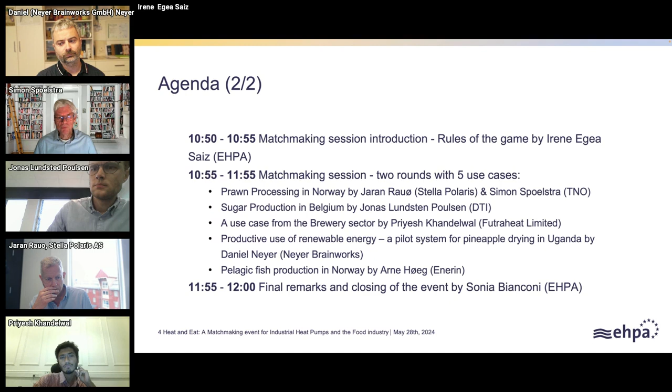So if we go to the next slide, I can introduce a bit the Remo platform interactions. In the first session, as you can see, you can only send reactions and type messages. There will be no Q&A for the presenters, so you will not be able to ask questions to our experts. Please save all your questions for the second session, where you will be able to switch on your camera and mic, send reactions, type messages in the chat, and questions are very warmly encouraged.

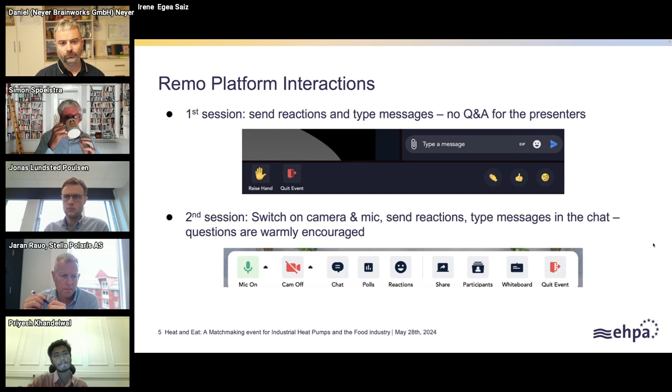And before leaving the floor to our speakers, I would like to give you a short intro of the 3 projects that we have here today. This event is being organized in the framework of these 3 projects. They are research projects funded under the Horizon Europe program, and they all aim at fostering the uptake of high temperature heat pumps for industrial application.

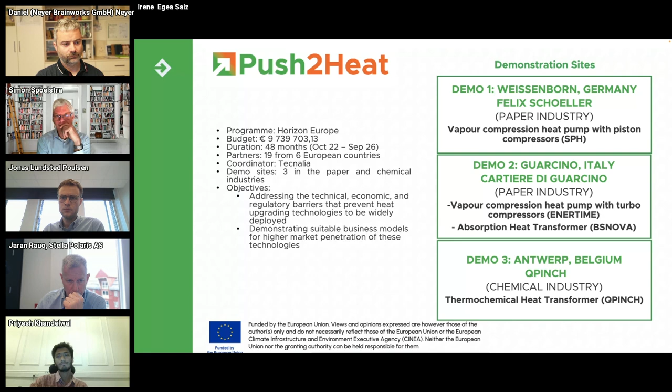So we have Push2Heat, whose demonstration sites are located in the paper industries and in the chemical industries. Then we have SPIRIT, whose demonstration sites are located in a sugar factory and a prawn processing plant in Norway. About these two demo sites, you will already be able to hear in the matchmaking part. Also a paper plant in Czechia is one of the other demo sites.

And then we have SusHeat, that aims to develop a new generation of highly efficient AI-assisted heat upgrade systems to harvest and store renewable energy for intensive factory processing needs. A case study about this will also be presented in the second part of this event.

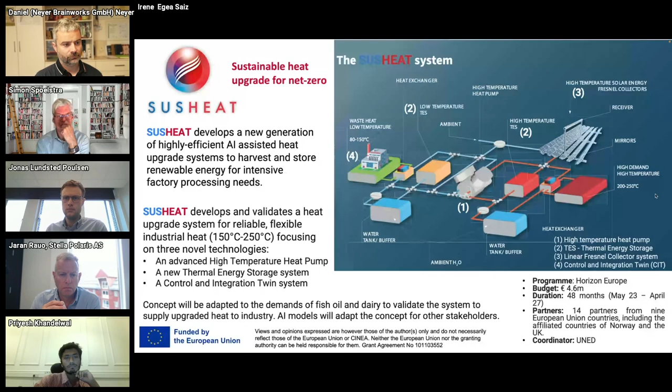And without further ado, I think we can stop sharing the slides and allow our first speaker to start presenting, Eric Lecomte. While Eric shares his presentation, I will say a little bit about him. Eric Lecomte is Policy Officer at the European Commission, DG Energy, since 2015. As Policy Officer at DG Energy, Eric is in charge of energy efficiency and transition to carbon neutrality in industry, but also heat pumps for industrial, commercial and residential applications and direct current technologies.

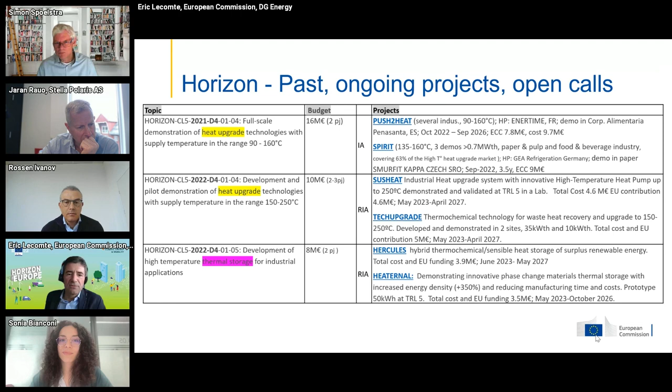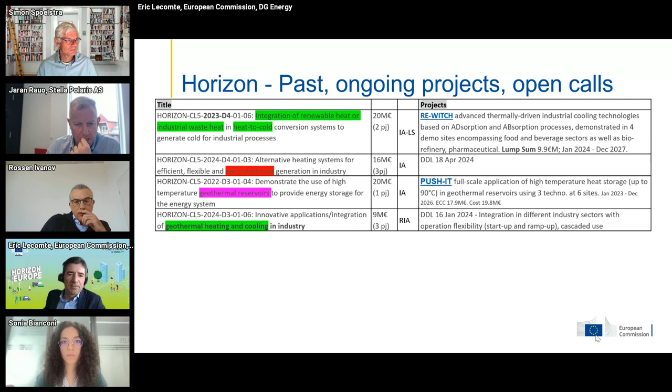And then also about storage in geothermal reservoirs, there is the project PUSH-IT. And finally, geothermal heating and cooling - not about heat pumps maybe, but also relevant for your sector.

Now looking more into the future, in the work program 2025 in the Horizon Europe Cluster 5, the one I'm in charge of, there will be one topic, but the bulk of the topics will be in Cluster 4. Obviously, in the Processes4Planet partnership, so this is only a draft that can still change.

So it's about really phasing out fossil fuel in energy-intensive industries through the integration of renewable energy sources - in plants where there is a significant heat or cool demand, with local integration of a combination of renewable energy sources, storage, process flexibility, heat upgrade by means of industrial heat pumps, and even combined heat and power from renewable biomass. A lot of freedom given to those projects to ultimately reach complete phase-out of fossil fuels.

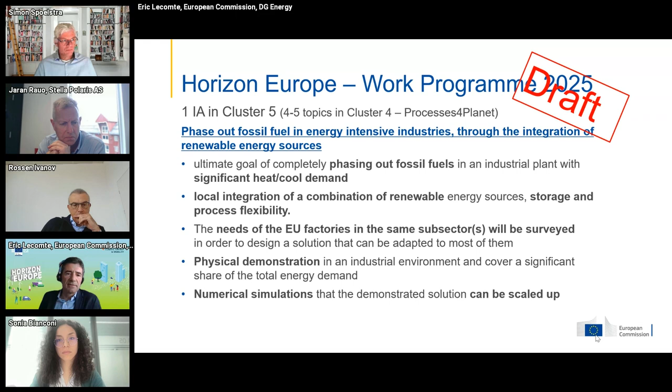Interestingly, the needs of all EU factories in the same subsector will be surveyed - not only one factory, but the whole sector, to design a solution adaptable to most plants in the EU. There will be physical demonstration of a significant share of total energy demand met by renewable sources, but also numerical simulations to demonstrate this physical solution can be scaled up to produce nearly all the energy needed in the plant.

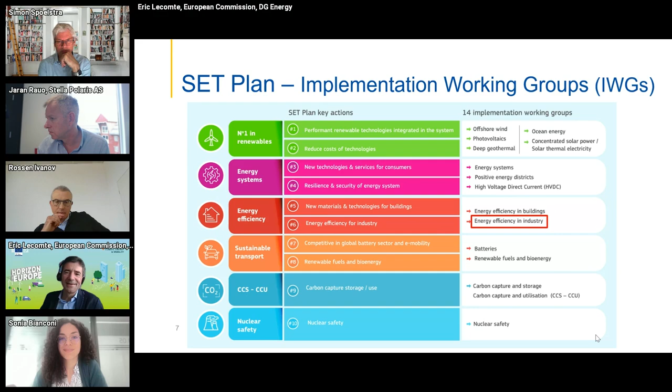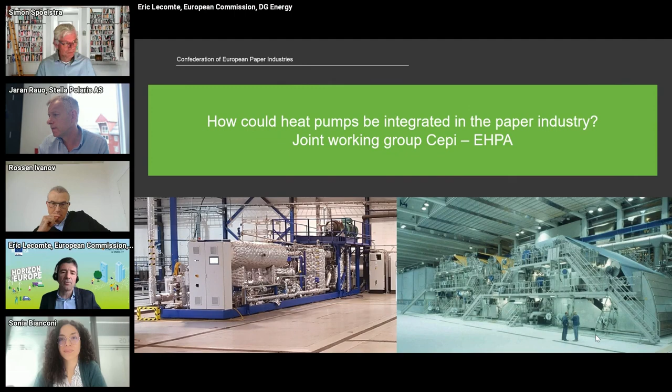And now I will continue with some slides borrowed from CEPI to explain a bit how they had this joint working group between the paper industry, CEPI, and the Heat Pump Association, EHPA. This is something we would like to replicate, for instance, in the food sector, hence very relevant for today in this workshop. So several steps that they have taken, 5 steps, which I will now describe in more detail.

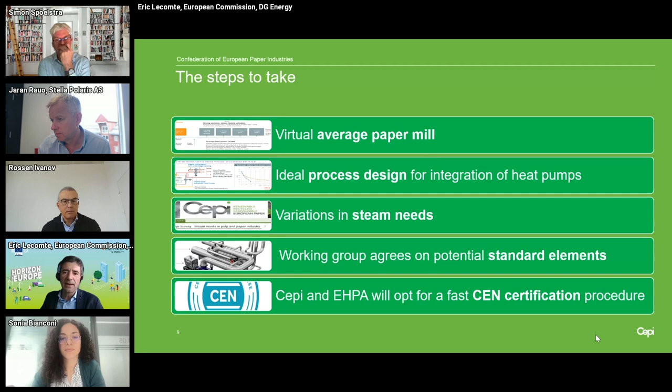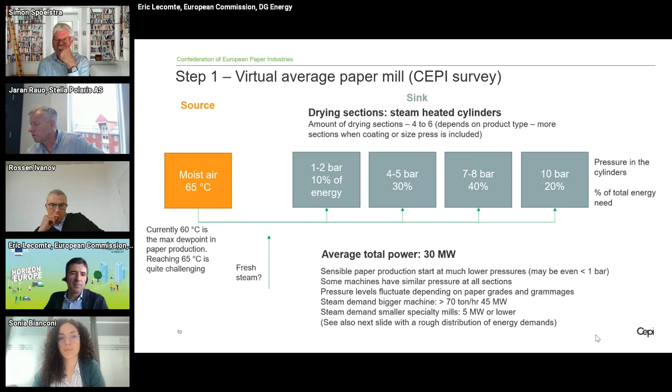So the first step is to make a survey of all the industrial plants, in this case paper, to define what is the virtual average paper mill. You see in gray all the heat needs, the 4 gray boxes, and on the left in orange, the source of heat, of waste heat at the exhaust of the process. So describing the average paper mill based on the survey, that is the first step.

The second step is to discuss with the Heat Pump Association to design a common heat integration design using heat pumps. You see the heat pump on the left that is using the exhaust air to produce steam, distribute the steam in the process, and then at the bottom, 3 consecutive recompression stages to raise, to upgrade the steam pressure and temperature to really meet all the needs in the paper mill. So that is the schematic of the solution.

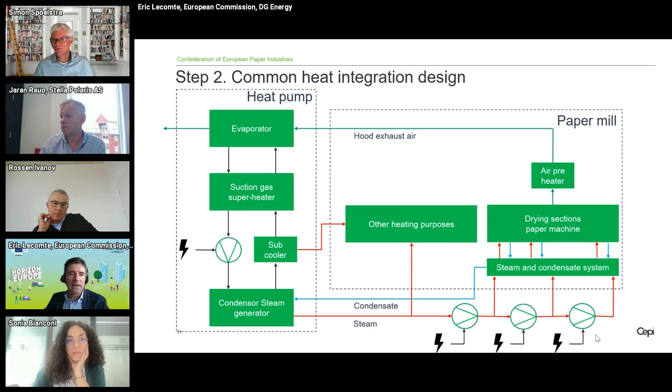But then there was a discussion because actually the needs expressed by the paper industry were a bit difficult to achieve efficiently by heat pumps. So they discussed what is the real pressure need, temperature need, and then they realized that actually they didn't need such high temperature or pressure, and so they reassessed the needs to optimize the heat pump solution.

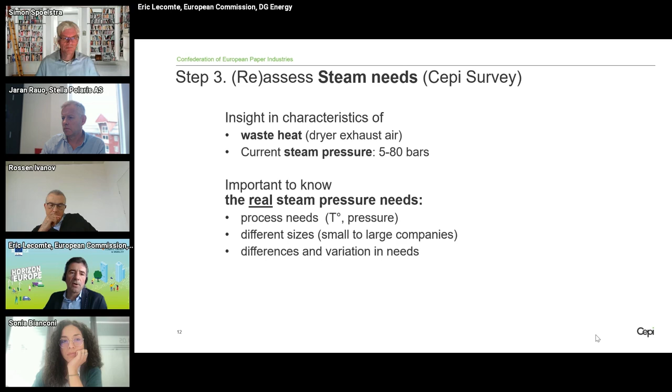But still then keeping flexibility inside each paper mill to arrange those common elements in the way they want in each individual paper plant.

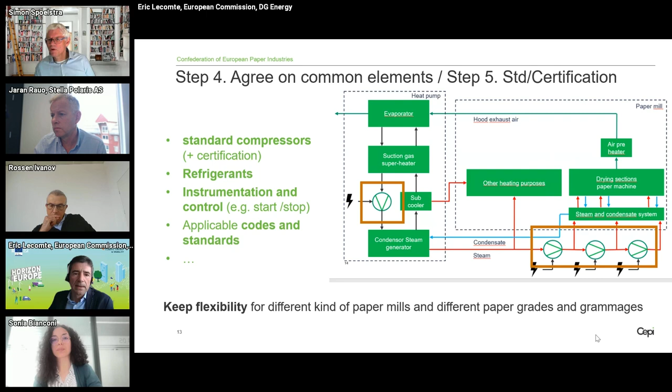So the benefits are indeed to have a common design, a standardized compressor, with much lower cost. Of course, better knowledge of each other - paper industry knowing heat pumps, heat pumps knowing the paper sector, understanding each other - and definitely lowering the risk for individual paper plants to go into the deployment of industrial heat pumps. And with lower risk and lower cost, of course, the business case is easier to build and easier to convince banks to go into the adventure.

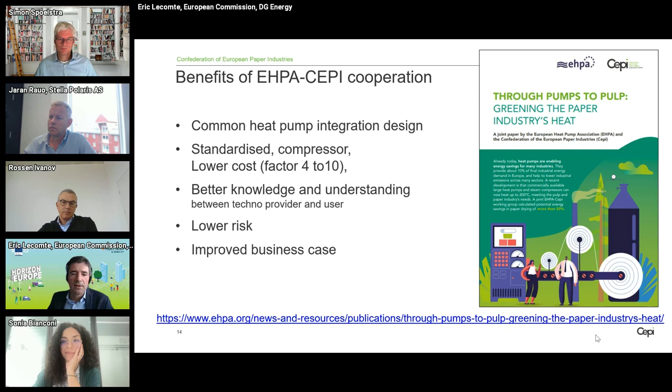So you have the link to the paper that describes this. And that's it from my side.

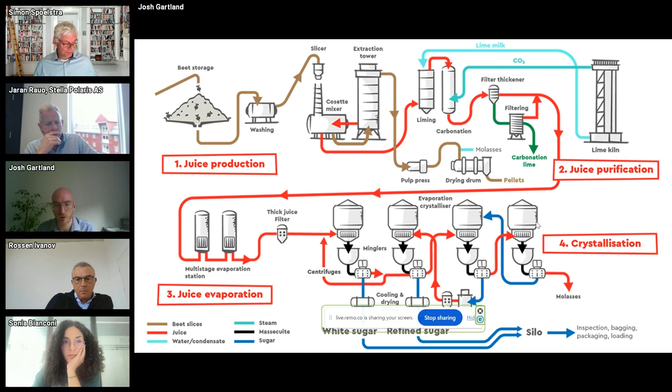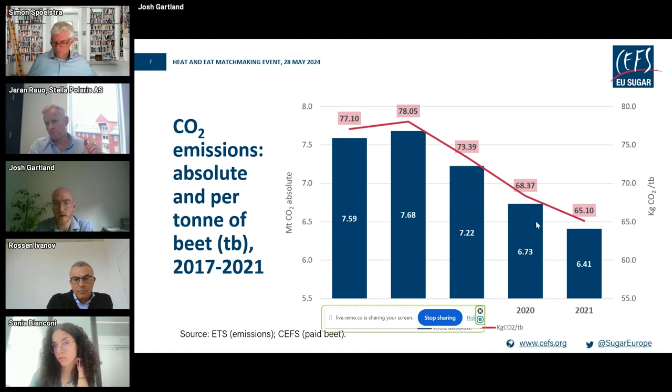So we have made progress in reducing our CO2 emissions. You can see since 2017, there's been quite a good reduction, both in absolute terms and in terms of kilograms of CO2 per ton of beet processed. So we do produce less sugar than in 2017 due to various reasons, but emissions are down not just because of that, and they're also down for every ton of beet we process.

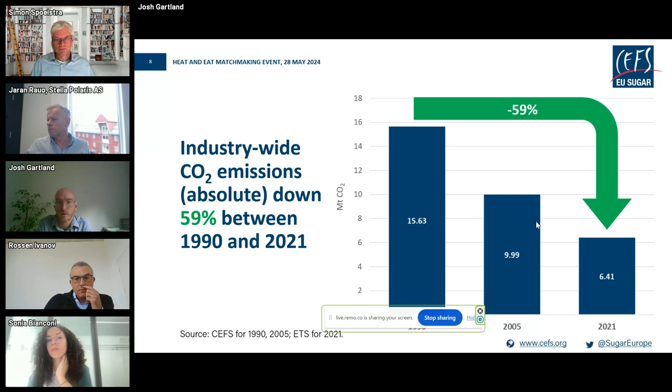And if we take a longer term view, we can see that emissions are down 59% between 1990 and 2021. So we've already reached the Fit for 55 target. We think that we'll deliver another 30% reduction by 2030. And we're aiming for climate neutrality by 2050 in line with the EU. So this is a possible trajectory of emissions in the sector.

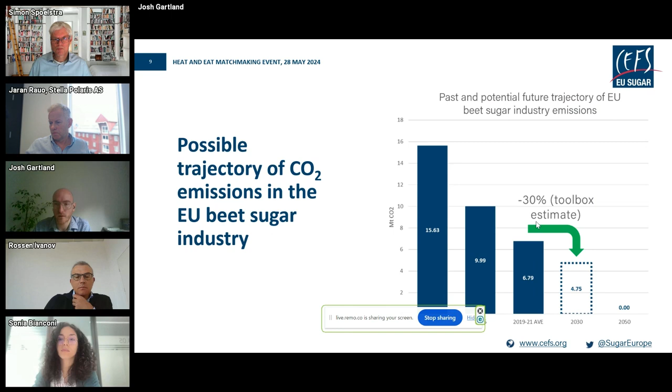And of course, there's an economic imperative to decarbonize. We're a carbon leakage sector again, and therefore we will see a reduction in free allowances at a higher rate than previously, and also emissions allowance prices will increase.

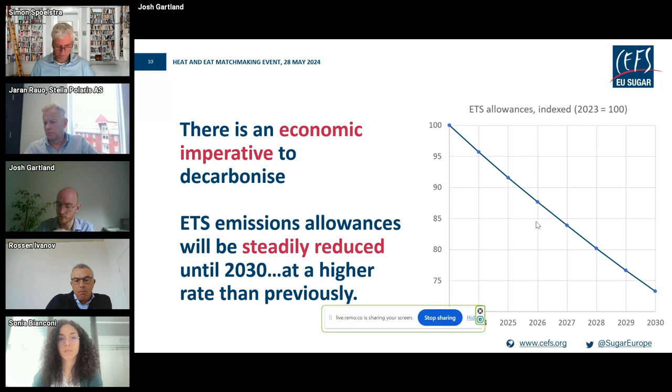In terms of the emissions hotspots, I think the biggest one is the production of heat and electricity. Our factories, because they're located in rural areas, they generally produce heat and electricity on site. I mean, all of them actually produce heat and electricity on site. And that can be over 50% of energy usage, generally more, and over 60% of emissions.

Where the beet pulp, which is the fibrous non-sugar residue, is dried to produce animal feed, that can use up to 50% of the energy generated, and it can contribute up to 30% of emissions. And then we have the lime kiln, which can be 5% of energy and up to 10% of emissions. It's more emissions intensive because we generally use coke as the fuel in the lime kilns.

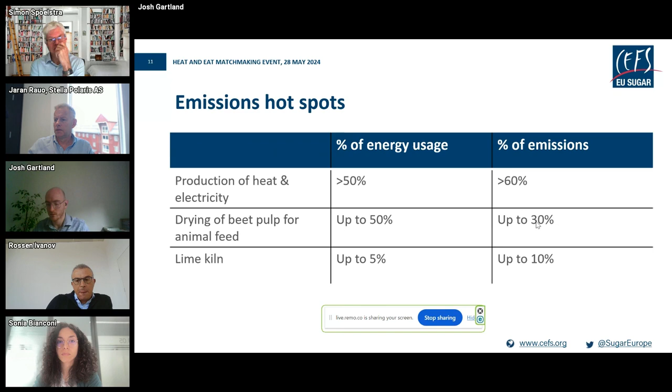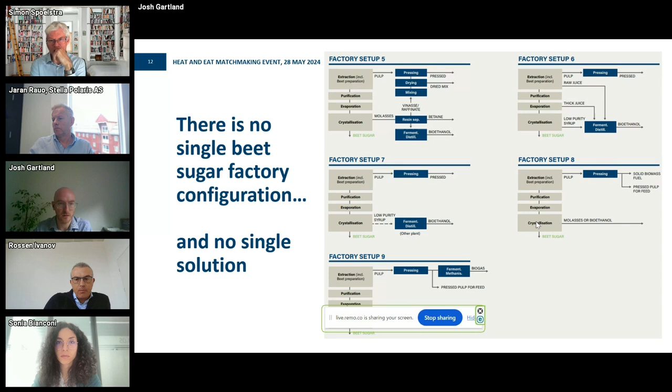We identified a number of tools. We split them into two baskets. So the first one was renewable energy, which can be own biomass residues. It can be external biomass and biomethane, and it can be on-site renewables.

And then we identified other tools such as low temperature drying of beet pulp, for example, where you reuse the waste heat from the sugar production process to dry the beet pulp. Heat recovery, such as additional evaporation effects, where you reuse waste steam in order to increase the efficiency of the evaporation stage. Heat pumps, which could be industrial heat pumps, but could also be mechanical vapor recompression, which we already use in the industry.

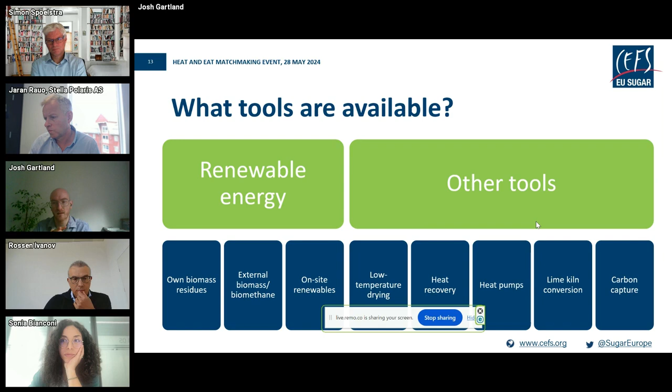Lime kiln conversion, which is where we would switch from coke to a less emitting fuel, or potentially even purchase the limestone that we use externally. And then another tool which is not used as yet in the sector, which is carbon capture.

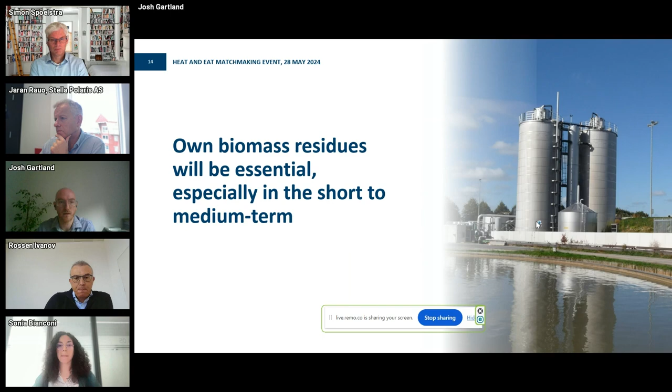Own biomass residues will be essential, especially in the short to medium term. So that's mainly the beet pulp. We think that could generate sufficient energy to power the factory, especially if it's a very energy efficient factory.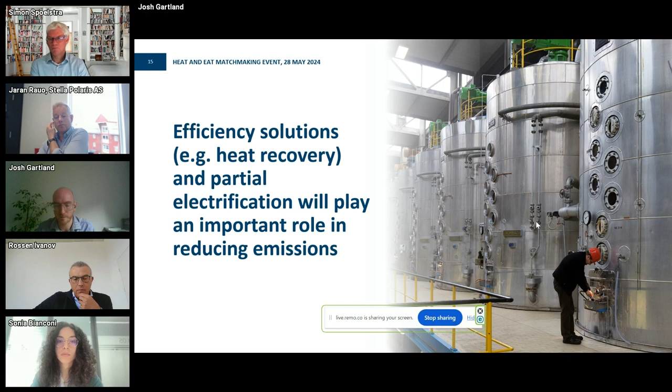That being said, in many cases, efficiency improvements are reaching their limit. For example, here you can see Germany. The energy use in the sugar industry has plateaued since 2000. So perhaps we need to look into other solutions.

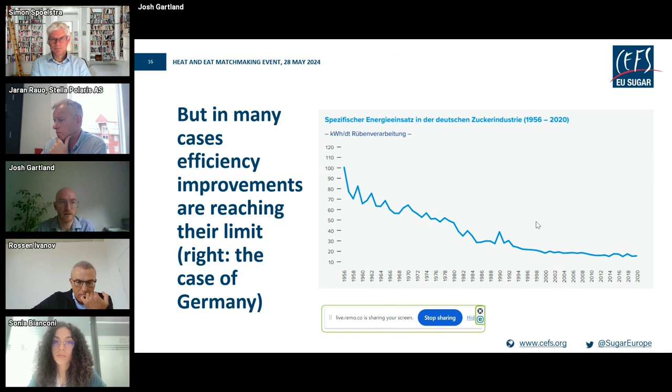One of these solutions is high temperature heat pumps, but these are still in testing phase, and the consensus among our members is that electricity prices need to be brought down in order for these to be viable.

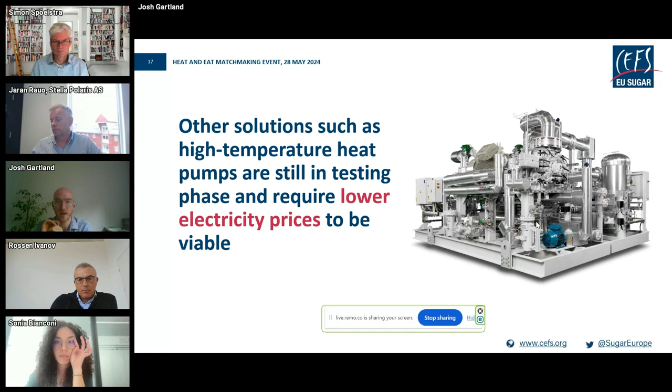If the coefficient of performance of your heat pump is 4, for example, but electricity prices are over 4 times as high as your natural gas prices or your cost of production of biomethane, then the industrial heat pump is not going to be viable. So lower electricity prices are really essential to make this solution work.

There's another type of heat pump I mentioned, called mechanical vapor recompression. You're basically recompressing the steam mechanically to increase the temperature. But that's generally compared with another solution, thermal vapor recompression, which is generally preferred just because it has lower capital expenditure and requires, again, lower electricity prices to be viable.

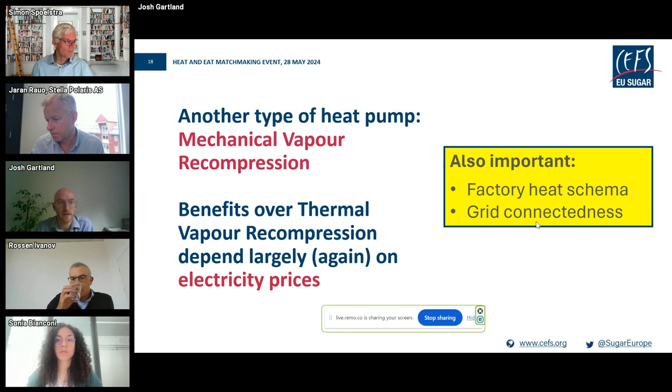Other important things for installing mechanical vapor recompression are the heat schema in the factory and the level of grid connectedness. Again, a general issue for us is that our factories are located in rural areas and don't always have good connections to electricity grids.

So the consensus is that full electrification is not for tomorrow, and something we hear far too much about is renewable low carbon hydrogen. I think it's going to be very expensive and scarce, and is not an appropriate solution for the sugar industry.

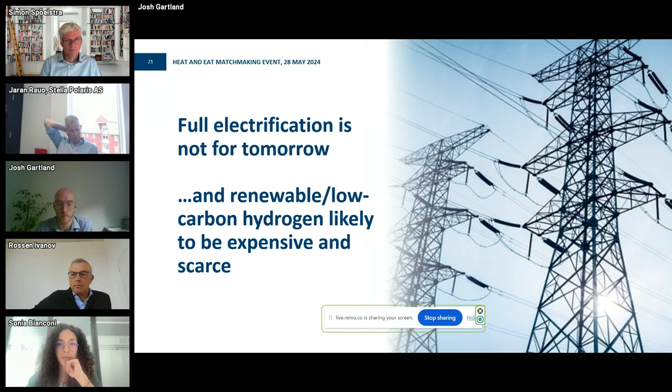In terms of the policy framework, we were asking for a pragmatic implementation of the Renewable Energy Directive to allow us to use biomass residues. On the Energy Taxation Directive, if that ever comes to light, we would want that to exempt the energetic self-use of residues. In general, electricity prices should be brought down. If the EU wants us to electrify, make it cost effective to do so. And the final request is we need direct financial support, grants, loans, carbon contracts for difference, so support that targets both the CapEx and the OpEx sides.

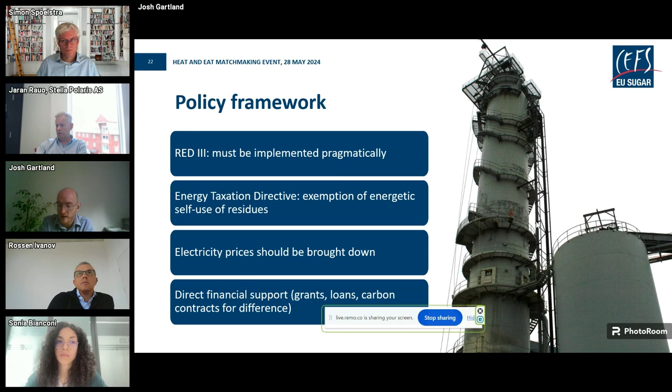That concludes my presentation. Thanks a lot for your attention and for the invitation.

Thanks a lot, Josh. Thank you for telling us more about the EU sugar processes, and of course the specificities of this industry need to be taken into account in order to integrate CO2 reduction technologies such as heat pumps, for example. I was actually very impressed with the numbers you showed in terms of emissions reductions that you've achieved so far. So great job, I would say.

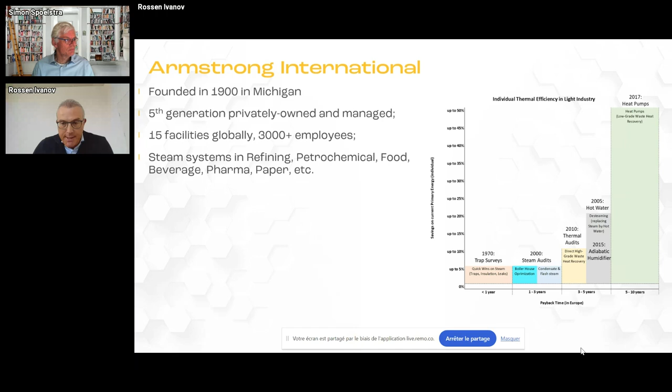And then we crossed the mirror. We went on the other side of the process and found waste heat recovery as a potential for further energy efficiency. First, direct heat recovery using high-grade heat, and then lately low-grade heat recovery using heat pumps. The reason is decarbonization. That's the paradigm shift for all of us, end users asking for ways to completely decarbonize their plants. We reached the conclusion that the only way to decarbonize heat without significantly increasing the energy cost is to leverage the significant amount of free decarbonized local waste heat available at the plants. So we put together a design methodology called circular thermal, where we are bundling pinch methodology, direct heat recovery, and low-grade heat recovery, using also de-steaming as a way to facilitate the implementation.

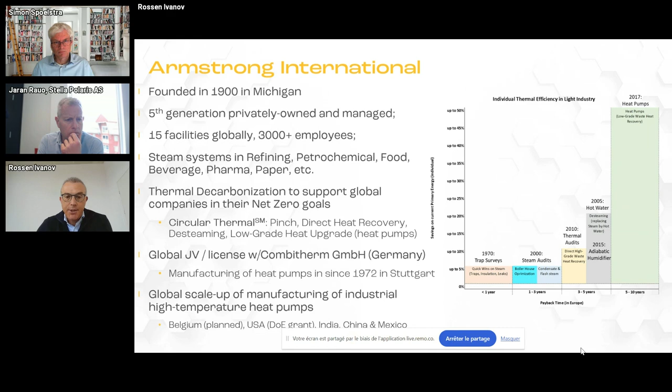As we did not have the technology in-house, we partnered with a German company called Combitherm, which has been manufacturing heat pumps for 50 years in Stuttgart, including above 80 degrees for the last 20 years. We are currently scaling up manufacturing of this technology across the globe: US, Belgium, India, China, and Mexico.

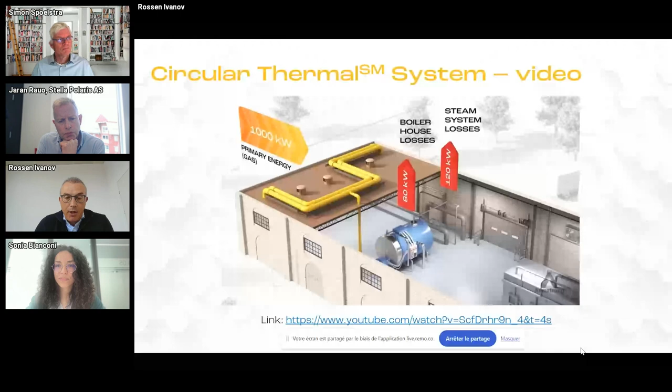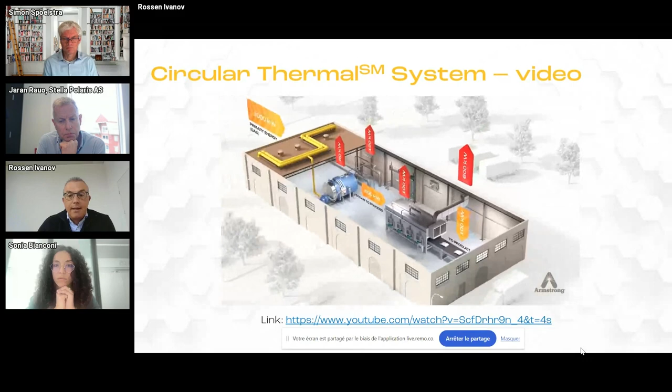The principle of circular thermal is quite simple. Historically, since the Industrial Revolution, we have been using a one-way system: we put energy on one side of the plant, typically natural gas burnt in boilers. Part of this energy is lost in the boiler house or in the distribution, condensate return, and flash steam network. Only about 80% of the primary energy ends up in the process, and very little of that goes into the product. Most of the time, energy is wasted in the form of low-grade heat through process stacks.

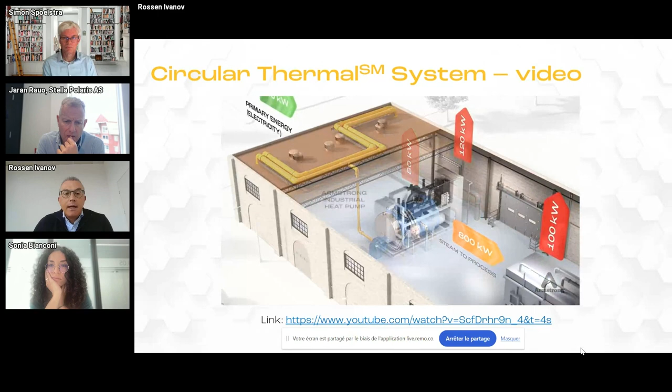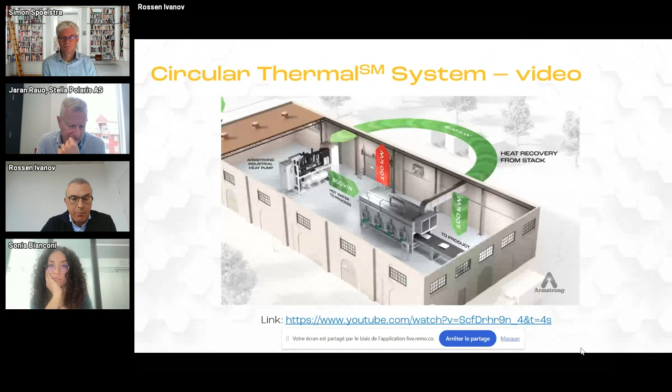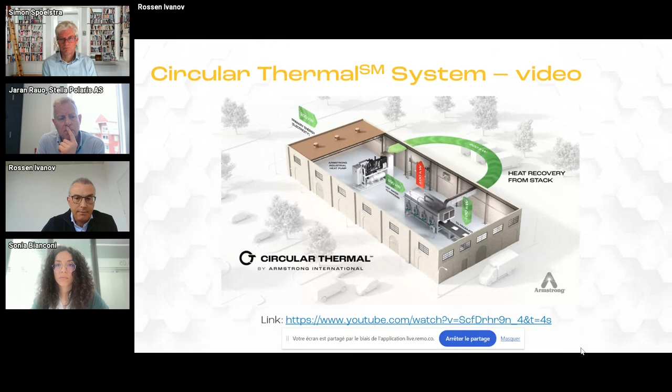The idea here is to apply circularity to heat, just as we apply circularity to material and to water. This means recovering the high and low temperature stacks and upgrading them to high temperature using heat pumps, as shown so far. Electrification also allows decarbonization if renewable electricity is used. The impact is a significant reduction of primary energy, up to 80% in the food industry, which typically requires temperatures below 200 degrees centigrade, and often less than 100 degrees centigrade.

A practical example—there will be a lot about Norway and fish today. This is an aquafeed plant from Cargill in Norway, with a dryer implemented by a Dutch company called Geelen Counterflow, using heat pumps from our partner Combitherm. The principle is the same: condensing the stack in order to get the latent heat, where most of the energy is, using the water network as a source, and then creating superheated water as a sink in order to heat the air.

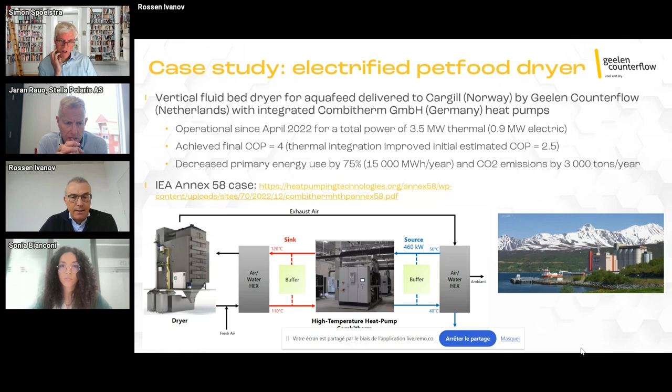This results in a 75% reduction of primary energy and 3,000 tons of CO2 per year. The trick to improving the COP is to use different temperature levels within the dryer in order to minimize the lift at every stage. The case is described in detail in the International Energy Agency Annex 58 Heat Pumping Technologies.

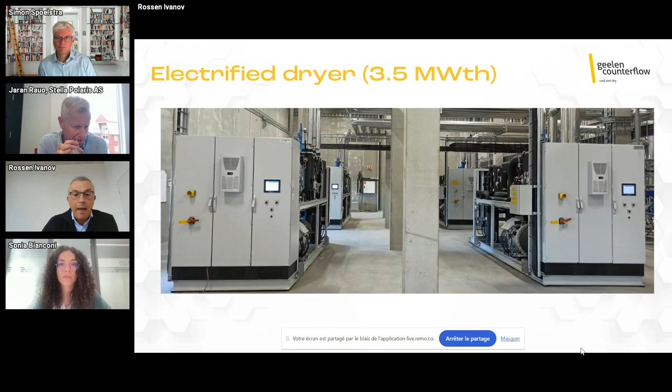This is the plant room with the dryers, for a total of 3.5 megawatts thermal, 4 heat pumps, and 10 compressors overall. I'll skip the video for the sake of time—it's on YouTube and you can have a look at it. It shows the factory and the dryer implementation.

The first point is that cooling systems are significant sources of waste heat. Cooling is about taking heat out, and chillers typically have a COP of 3, so they produce 3 times more waste heat than their electrical consumption. Plants using refrigerant systems for deep cooling, such as frozen meat or ice cream, have significant sources of waste heat. Eliminating cooling towers also helps with customers' water targets, because cooling towers are one of the most significant users of water within industrial plants.

On the heating side, as already mentioned, the stacks can be recovered. We're looking at de-steaming, because generating steam with heat pumps is feasible but requires quite a lot of capex and opex. So lowering the bar for heat pumps means moving into superheated water below 120 degrees C. The other advantage is that we can store water relatively easily, while storing steam is practically impossible. There are steam accumulators, but practically they are superheated water tanks, and then steam is flashed.

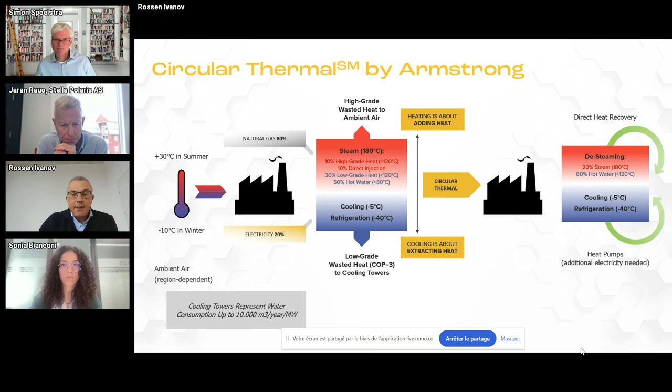However, this energy is still required. Using heat pumps to do the difficult work of recovering low-grade waste heat at the lowest temperature and bringing it up to the highest temperature needed in the plant allows for a further decrease in overall primary energy.

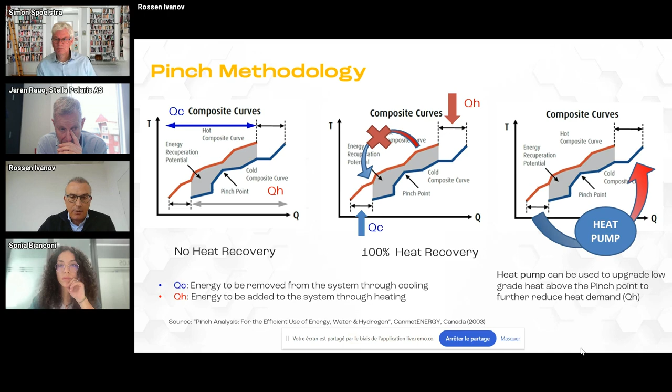In the curve on the right, the only energy going into the plant is actually the electricity for the compressor in the heat pumps. We're reaching that kind of design leveraging pinch methodology in quite a lot of food plants requiring low temperature. The other point in the pinch methodology is looking further and further into the temperature needs.

Many people start by asking for a heat pump at 170 degrees because that's the temperature of steam they're currently using in their utility system. That's what we call the black box in the pinch methodology. Going beyond the control valve, looking at what's going on inside the heat exchanger is quite interesting. Often control valves are decreasing the temperature of steam quite significantly—in that example, down to 130 degrees.

Going even further and looking at the other side of the heat exchanger, at the actual process temperature, is often very eye-opening, and it allows us to further maximize the coefficient of performance by minimizing the temperature lift. This is the white box in pinch.

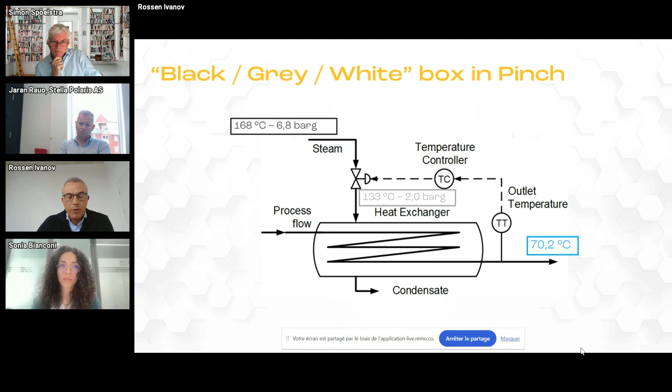Amazingly, the process engineer today starts to become very open-minded once the consequences of these high temperature lifts are understood. Minimizing the temperature lift really allows us to decrease both the capex and the opex on the heat recovery side. Of course, the heat exchangers need to be bigger—we need more heat exchange surface with hot water than we need with steam, and that's the kind of trade-off which is designed every day.

As mentioned, heat pumps can generate steam at low pressure, and this steam can be further compressed using MVR. MVRs on the market and steam compressors of various technology allow us to reach 200 degrees centigrade. Going further might be technically achievable, but the lift starts to become important.

The sources within food plants are again cooling systems—the waste heat going to cooling towers—and the other source is the stacks. Condensing these stacks often results in less than 100 degrees, so lifting that temperature by more than 100 or 150 C would become uneconomic, even if it is technically feasible.

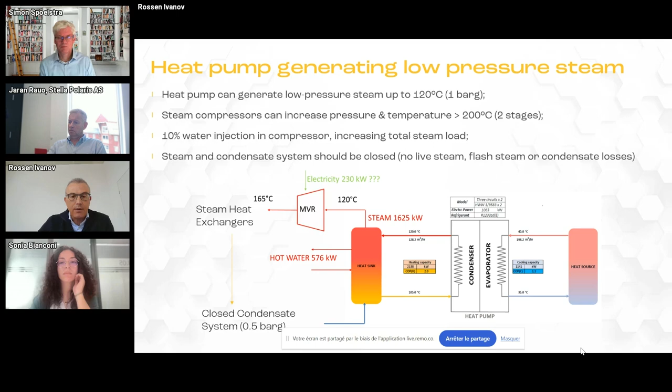The second important point to understand is that steam systems are not just one way. Condensate needs to be recovered beyond the heat exchangers. These systems should be as closed as possible, so flash steam should be recovered and condensate should be recovered in order to be sent back to the evaporator.

An example of steam in our demo unit: how do we optimize the efficiency and the cost of this circular thermal system? The temperature lift is a very important criteria, but beyond that, de-steaming helps. We eliminate the boiler houses, but also help eliminate the flash steam losses, bringing further cost savings.

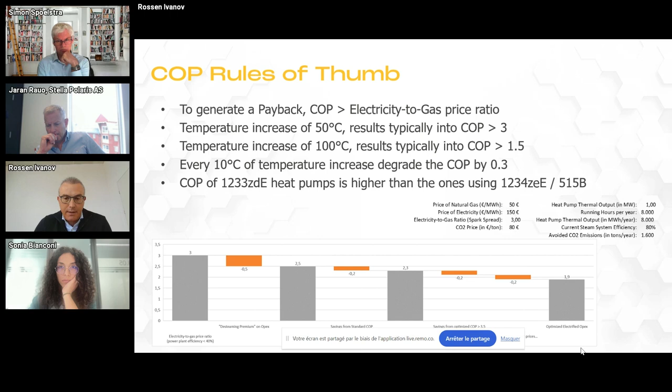Then the integration of the heat pump with the system is a very interesting area of development. Heat pumps are not that simple to design—they can be quite flexible in the refrigerant loop, and we can integrate quite a lot of heat recovery within the heat pump. On the other side, the system can be adapted so that it maximizes the efficiency of the heat pump. This thermal integration brings a lot of improvement in terms of COP for the system.

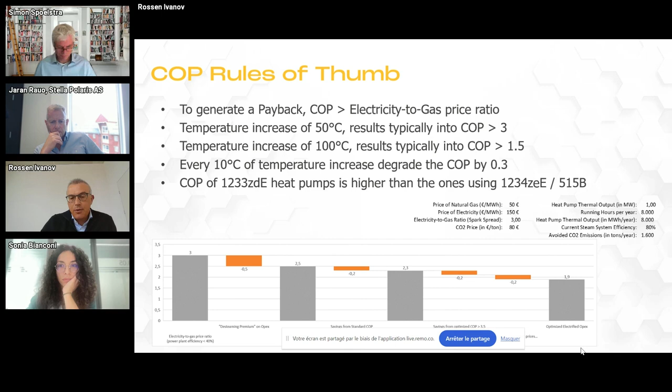Finally, in terms of cost, heat pumps typically come with hot water tanks—some people call them thermal batteries now. They help store heat, and this system can run when the spot price of electricity is lowest. So they help the grid, they help with the intermittency of renewables, and they help lower the cost of the system through the year.

So a typical roadmap in the food industry might look like this: de-steaming helps lower the bar for waste heat recovery. Direct heat recovery should be used first, and then low-grade heat recovery with heat pumps. Only then comes the switch to renewables—biomass, biogas, potentially carbon capture, or e-boilers—which might help fulfill the gap that remains in terms of energy efficiency and CO2 emissions.

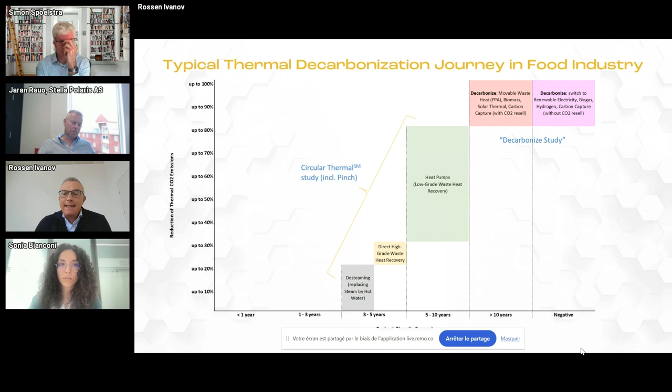But these should not be used before waste heat recovery. The risk is that we start using renewables and start generating renewable waste heat—and that's the last thing we want to do, considering the investment for renewable energy.

So for those who are interested, we have a white paper on the subject of circular thermal, and it develops the concept further. That's it for me.